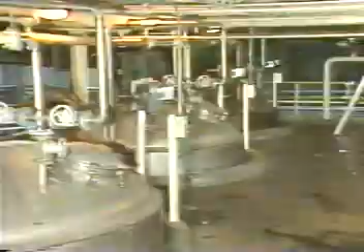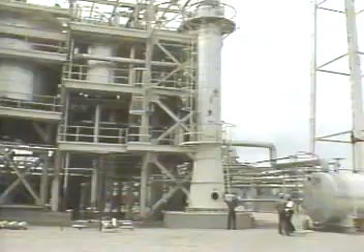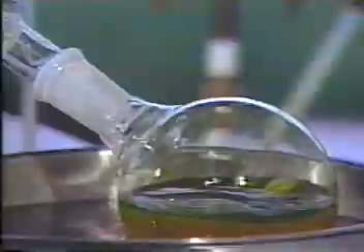Process industries provide us with a great diversity of products. Many of these products, such as plastics, chemicals, food products, and pharmaceuticals, are produced in batch processes. In a batch process, close control of operating parameters is essential to ensure safety and product quality. Good control also reduces production cost and increases profitability.

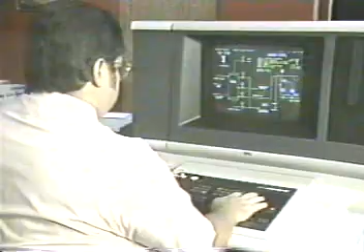Carefully designed systems can provide excellent control of batch processes. In these programs on batch control, we'll look at a variety of systems that can be used to effectively control the critical variables in a batch process. In order to understand their unique control requirements, it's important to become familiar with the characteristics of typical batch processes. We'll look at a variety of processes and discuss requirements for control.

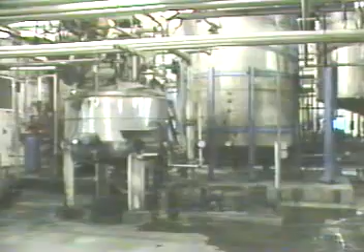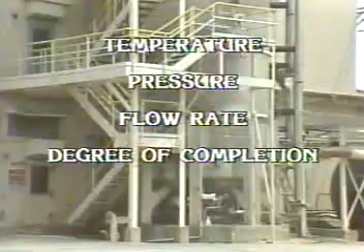For example, temperature is often the most important variable and must be controlled throughout the reaction cycle. Other critical variables may include pressure, flow rate of reactant, and degree of completion of the batch reaction. We'll see how instrumentation systems, from simple to complex, can be used to control these variables in a batch process. But before we get into control, let's first go back and talk about the characteristics of a batch process.

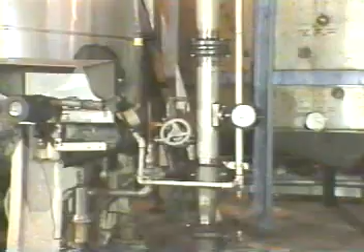What is a batch process? What makes it different from other processes? In simplest terms, a batch process can describe anything that is made one batch at a time. Actually, many of the daily activities you're familiar with are batch processes. For example, making a pot of coffee is a batch process. While this example is fairly simple, it does illustrate many of the steps involved in any batch process.

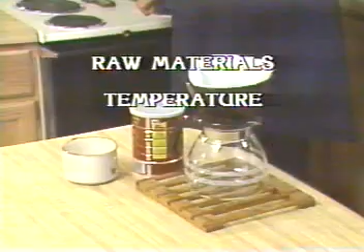For example, in making coffee, you start by measuring the proper amounts of raw materials, in this case, coffee and water. Next, you apply heat until the water reaches the proper temperature. Then you feed the water through the ground coffee to extract the brew. Your knowledge of the requirements for a good cup of coffee is the key to control of this process. The considerations for making a quality cup of coffee are the same as those we'll look at in industrial batch processes: control of raw materials, control of temperature, and control of the rate of the reaction.

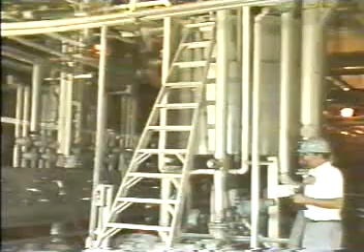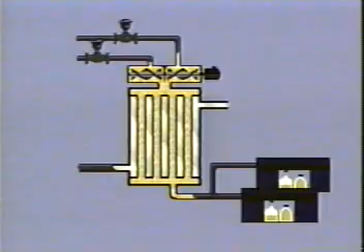How do these control requirements differ from those of other types of processes? One way to put batch processes in perspective is to compare them with continuous processes. Since you may already be familiar with continuous processes, let's start there. In a continuous process, measured quantities of materials are continuously passed through a reaction vessel at a controlled rate. Products are continuously withdrawn. In earlier programs in this series, we've looked at several continuous processes. We've seen how they are designed to produce a large volume of a particular product, and we've seen how the control systems in a continuous process are designed to maintain the process conditions in a steady state.

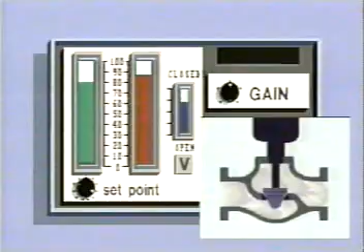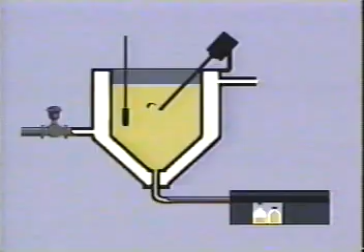In a batch process, on the other hand, products are made one batch at a time. Here, measured quantities of reactants are brought together in a vessel or reactor and allowed to react to form products. When the reaction is completed, the products are discharged from the reactor. Then the cycle can be repeated. A batch process is typically used when smaller quantities of specialty products are needed, or when the process does not lend itself to a continuous operation.

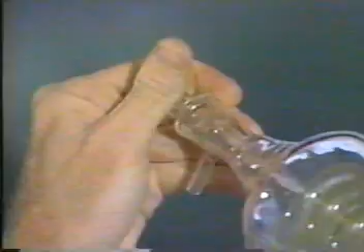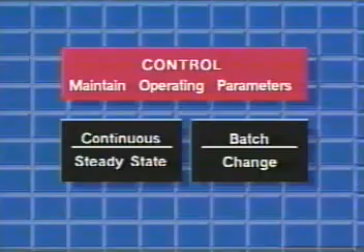So, control of both continuous and batch processes is designed to maintain the operating parameters required to produce the finished product, but with this difference. In a continuous process, control focuses on maintaining a steady state. In a batch process, control focuses on regulating the changes that take place. With this general overview in mind, let's look more closely at some key control requirements that distinguish a batch process.

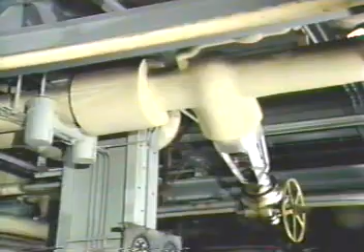One difference is in the way raw materials are fed and handled. In a batch process, exact quantities of raw materials are required for each batch. Because of this, the control system in a batch process must provide a way for volumes of raw materials to be measured. In a continuous process, on the other hand, there's generally a continuous feed of materials, so precise flow control of raw materials is a critical part of the process.

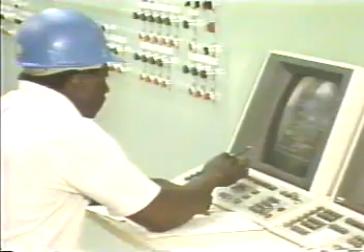Another control requirement for batch processes is controlling the sequence of events or steps in the process. Batch processes usually require a sequence of steps, such as feeding, mixing, heating, or reacting. These steps are determined by the type of process and the product being produced. During each step, variables such as temperature, pressure, reaction time, and mixing rate may change considerably. For example, one step of the process may require a high temperature and another step may require cooling, so control requirements vary during different stages of the process. In a continuous process, however, the set points for process variables usually remain constant.

Batch processes generally have specific recipes for each product. Control is designed to implement a particular recipe, but because of the flexibility of the instrumentation, the same process equipment can often be used to produce many different products or product grades. Control in a continuous process, on the other hand, is designed to maintain stability of a process and of product quality, despite changes in process conditions.

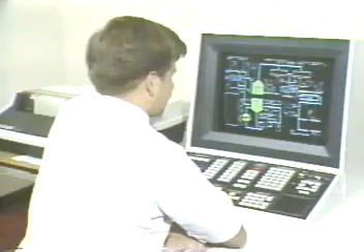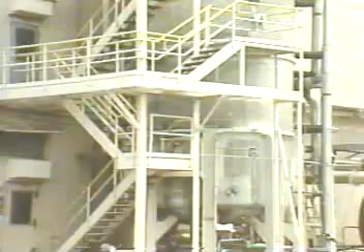You might find instrumentation hardware in a batch process that is identical to the control equipment used in a continuous process. However, the applications of this hardware are usually quite different. In a batch process, the product is made in a batch reactor, so the instrumentation system is configured to meet the unique control requirements of the reactor.

What are the control requirements of a batch reactor? How can these process requirements be automatically controlled in a batch process? Let's use a familiar example of a batch operation to illustrate the basic features of a batch reactor. Then we'll look at an industrial reactor.

So, with a kettle, a cover, an agitator, and a heating or cooling supply, a basic batch reaction can be accomplished. However, there are ways to make the reactor more efficient. Placing a pot directly on a burner is not in reality a very efficient way to heat whatever is in the pot. The ingredients in contact with the bottom of the pot are directly exposed to the heat, while the ingredients at the top are heated only through heat transfer along the sides of the pot, or through the medium being heated. It takes a lot of stirring to keep the ingredients combined and the heating consistent.

A more efficient way to heat the ingredients is to surround both the sides and bottom of the pot with the heat. This is essentially what happens in a double boiler. The hot water in the bottom of the boiler regulates the temperature and also permits the heat to be distributed more evenly. Less stirring action is needed.

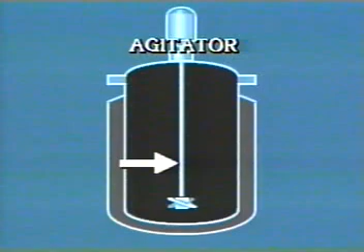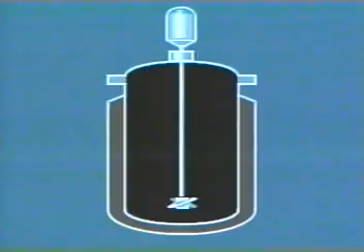The reactor is usually fitted with an agitator. In addition to blending the raw materials, the agitator also helps in heat transfer by bringing more of the product in contact with the heat source. The agitator in an industrial reactor is more efficient than the spoon used in our previous examples because it can be used while the reactor is under pressure. A stuffing box or mechanical seal around the agitator shaft ensures a tight seal when the reactor operates under pressure. The agitator speed can be changed using a variable speed drive motor.

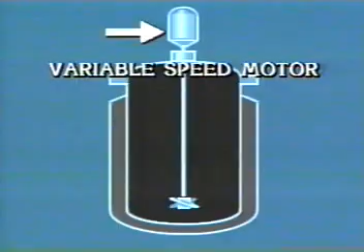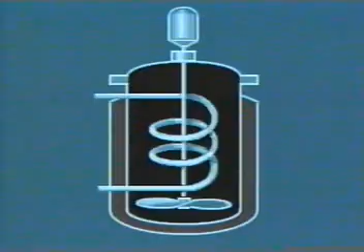The reactor is often enclosed in a jacket that allows a source of heat or cooling to be in contact with a large proportion of the surface area of the kettle. There may even be an additional source of heat or cooling in the form of a coil within the reactor. Most industrial reactors also have lines for feeding measured quantities of raw materials, and there's usually a discharge line from the vessel through which the finished product may be removed.

These are the basic features of a typical batch reactor. The specific arrangement of the reactor and its control instrumentation, however, depends on the type of process. So let's take a few minutes to look at some types of batch processes.

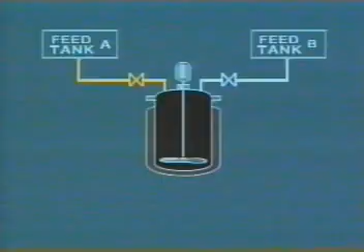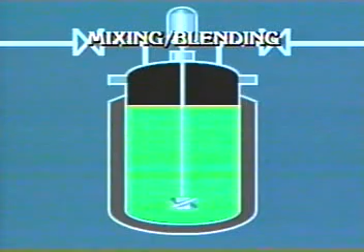One type of batch process is a mixing and blending process. Mixing and blending is a simple batch process which may not involve any chemical reaction. However, control of process variables such as mixing time, temperature, and pressure is important in order to produce a quality product. Paint making is one example of an industrial mixing-blending process. Most of the cooking you do in the home involves mixing and blending processes.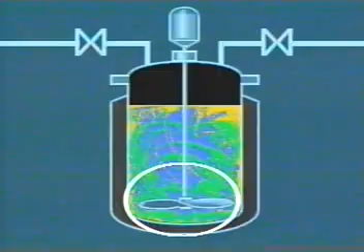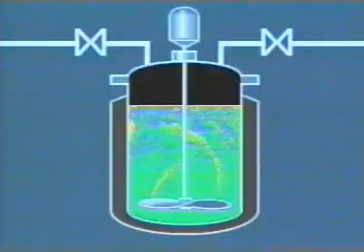A mixing-blending operation usually mixes ingredients by an internal agitator. In a batch reactor, mixing speed is controlled by agitator motor speed. This is similar to the way you'd control the speed of a household mixer. There's another point about mixing or blending operations that's important to consider. Often, mixing is made easier when heat is added.

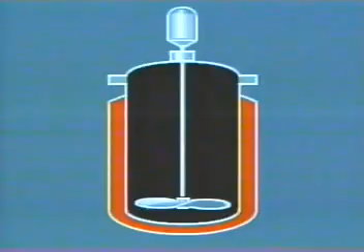Here's an example that you're surely familiar with. Try dissolving instant coffee or sugar in a cup of cold water. It takes a lot of stirring and a lot of time. By heating the water, you can speed up the process. In industry, the same principle is used. Heat may be added to speed the mixing and to reduce the amount of agitation required. So, mixing and blending is one type of batch operation, or in some batch processes, mixing and blending may be one step in the recipe.

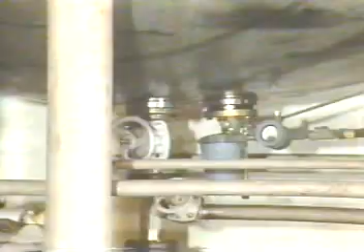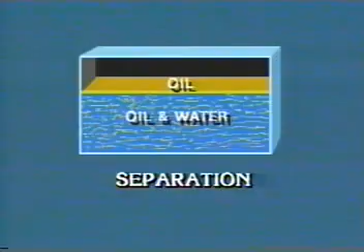Another type of process that may be accomplished by batch control is separation. Separation is essentially the opposite of mixing and blending. What you're trying to achieve in a separation process is to take out some component from a mixture. An example of a separation process is the separation of oil from water. As this simplified drawing shows, the oil rises to the top of the reactor. Heating or cooling may be used as part of the process to improve the separation so the water can be removed. As you can imagine, in a process like this, agitation would not be desirable.

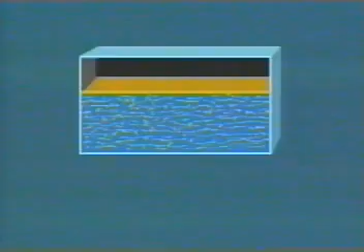Another type of separation is crystallization. Crystallization involves the formation of a solid from a solution, melt, vapor, or different solid phase. Many medicines are made through crystallization processes. So, what are the key variables in a separation process? As in mixing-blending processes, temperature is one of the important factors to consider. But in a separation process, agitation may be a detriment to the reaction.

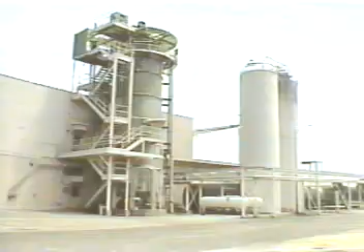Now, let's look at another type of reaction that may be done in a batch process: polymerization. While the name may not be familiar, the types of products formed in this process surely are familiar. Many plastics and synthetic fibers are made by polymerization. Essentially, polymerization is a process in which a large number of molecules of the same type are combined to form a product. It may require a combination of temperature, pressure, and a catalyst to enable a polymerization reaction to take place.

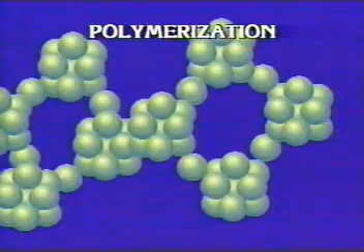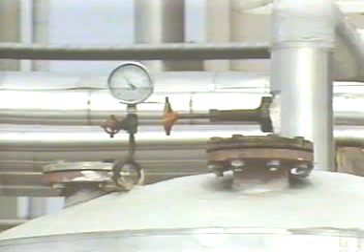Another type of batch process involves chemical reactions. A chemical reaction may be thought of as the bringing together of two or more raw materials or reactants under the influence of temperature or pressure to form one or more products. Chemical reactions are used extensively in industry, both in batch processes and in continuous processes. The types of products that are made in batch chemical reactions are diverse, from pharmaceuticals to products such as antifreeze, fertilizers, and pesticides. Chemical reactions usually occur under the influence of temperature and pressure, and like some other types of batch reactions we've talked about, the reaction can be affected by a variety of factors, such as agitation, use of a catalyst, and heat transfer.

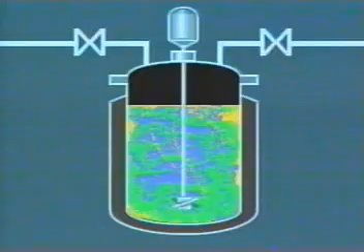So, we've looked at four typical types of batch processes: mixing and blending, separation, polymerization, and chemical reaction. However, many batch processes involve a combination of these processes, and often other factors as well. As a matter of fact, a batch reaction may be one part of a continuous process. It's this complexity, along with the unique characteristics of every process, which make batch control so challenging. Let's look at one typical batch process to see what's involved. It'll give you a feel for both the complexity and the uniqueness of every batch process.

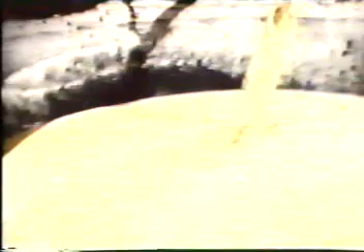Whiskey making is a classic example of a batch process. There are several different steps in the process, and several of the types of batch operations we just discussed are involved. In addition, in order to produce a quality product, many variables must be controlled, including quantities of raw materials, temperature, pressure, level, and rate of reaction. Let's begin by looking at the steps involved in the process.

First, the ingredients, such as barley malt, rye, or corn, are cooked to extract the starch and sugar. Then yeast is added to produce alcohol. Yeast is a primary ingredient which causes fermentation through enzyme action. After it's fermented, the mixture consists of water, alcohol, and residual yeast. There's a limit to the percentage of alcohol that can be produced by enzyme action. So, to produce whiskey, the alcohol must be concentrated,